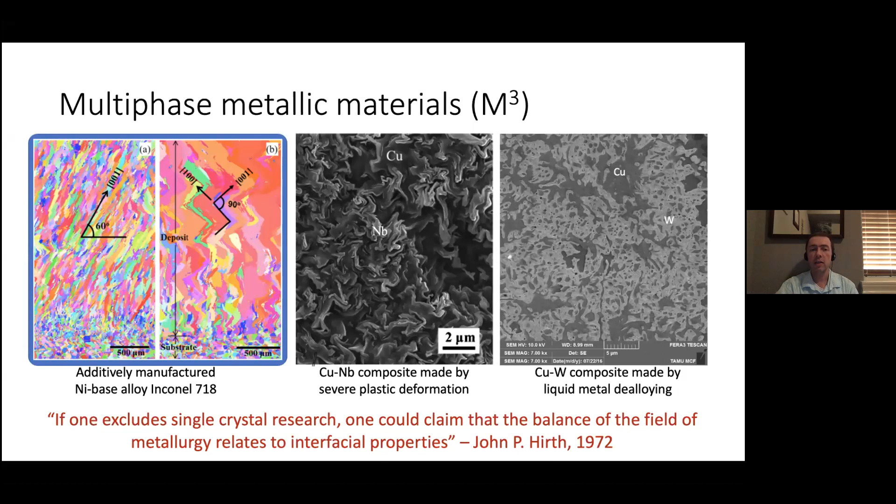Of course, this is true of the response of materials to all kinds of different stimuli, including mechanical deformation, irradiation, corrosion, and all kinds of other factors. But in the Center for Research Excellence on Dynamically Deformed Solids, we are in particular interested in high strain rate mechanical response.

This is the only organization slide I'll show related to the center itself. We are a center that got started in 2018. We have four different institutions—Texas A&M is the lead university, and the other three are UC Santa Barbara, University of Michigan, and University of Connecticut.

Our goals are to predict the influence of microstructural heterogeneities, especially interfaces, on high strain rate response. That's basically all I'm going to tell you by way of introduction.

The rest of this talk, I'll go through three separate vignettes where I tell you a little bit about examples of how interfaces influence material properties.

Here are the spoilers—I'm going to come back to this at the end of the talk when I wrap up. The big takeaway messages I want to give you are that interfaces are not just dividing surfaces between grains; they have their own structure and their own properties. Interfaces affect materials' response at multiple length scales, and that'll become clearer in a minute. And we now have the computational and experimental tools to build fundamental physical understanding of solid state interfaces.

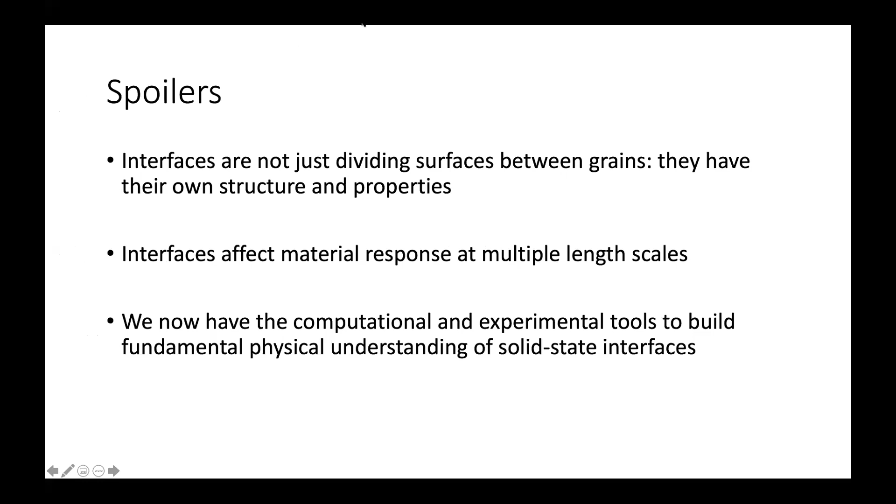So let's move on to the first one, interface structure at the composite scale. Let me just make clear what I mean by that.

At the composite scale, here are examples of two composites. The one on the left is a composite of copper and tantalum in 50-50 proportions, made by equal channel angular extrusion, a processing method used for changing the internal structure of composites. The one on the right is a copper-iron composite made by direct metal deposition, a kind of additive manufacturing of metals. In both cases, you can fairly easily see that there are phase boundaries.

So for example, here are some phase boundaries on the right. Those lines I drew are phase boundaries. Here are other phase boundaries on the left. Within each phase, there are also grain boundaries, since these individual constituents are not single crystals—they have multiple grains inside, and between all of those grains there are grain boundaries.

So these composites are made up of different phases, but they're also made up of different interfaces. The question we have is: how do the properties of those interfaces influence the response of the composite? I'll give you one simple example of something we've actually investigated recently within CREDS, just to give you a sense of the effect interfaces can have.

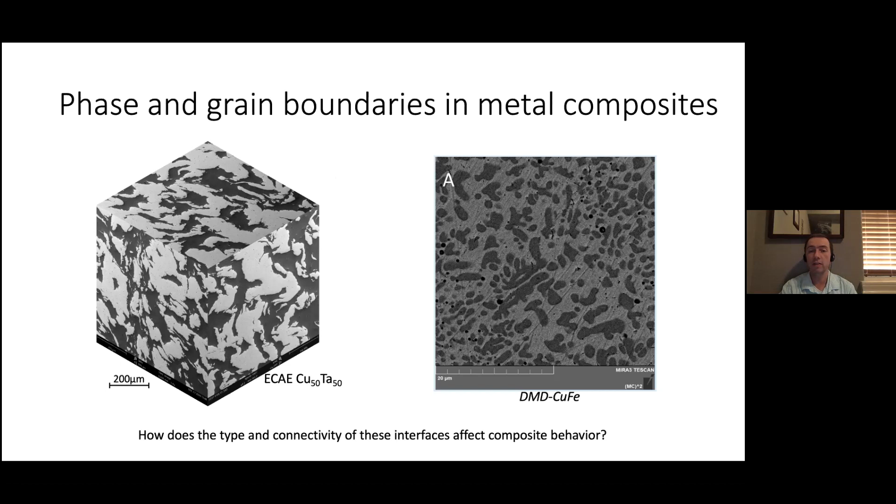I'll briefly tell you about some finite element modeling we did. This is an FEM domain, a simulation domain we investigated, where we put in a crack. This initial crack could be there from processing, from deformation, or through a variety of environmental factors as well.

We applied a far-field tensile strain on this model by applying tractions at the end of a large region, region 2, which was coarsely meshed to conserve computational resources. On the inside, we had region 1, which was more finely meshed.

If you zoom in and look, we actually made it so the structure was made up of a microstructure, a tiling of hexagonal grains. You can orient a tiling of hexagonal grains in different ways. We had orientation 1, shown here in the middle, and a different orientation, orientation 2, which was a 30-degree rotation of the first.

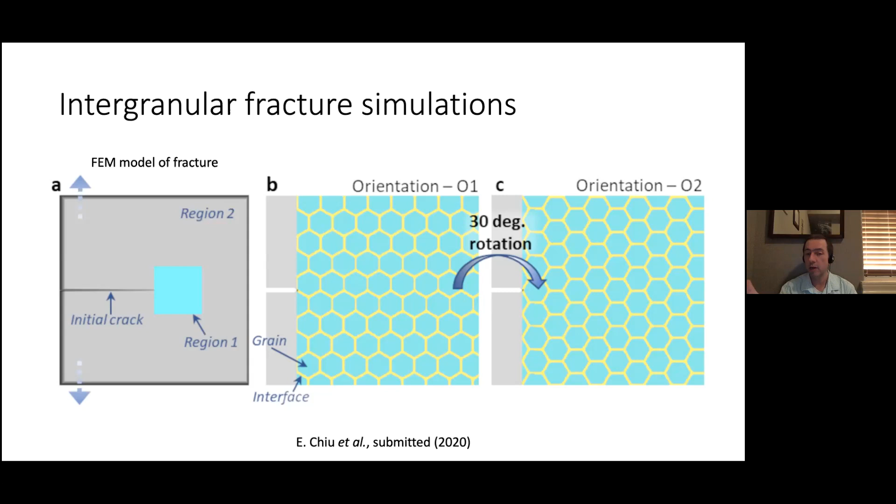We investigated how the crack runs through these microstructures. Here is a crack that runs through orientation 1, when all of the grain boundaries are exactly the same type—let's say all equally strong—and the crack is oriented for easy propagation along the interfaces between these grains. This solid very easily undergoes intergranular fracture.

If you look at orientation 2, the crack now takes a somewhat more tortuous path. It's harder for it to go from left to right, because this particular orientation isn't as conducive for a straight crack to run directly across. You see a bit more tortuosity, a bit more deflection, but overall it's still a single crack running from left to right.

What we did then is start introducing into this model elements, in particular interfaces with a different strength from the yellow interfaces here. The yellow interfaces, which you can see here, are strong—what we call strong interfaces. Scattered throughout the models on the right, you'll see a couple of isolated instances of red interfaces, and those are weak interfaces. So we scattered in occasional weak interfaces and repeated the simulation to see what happens.

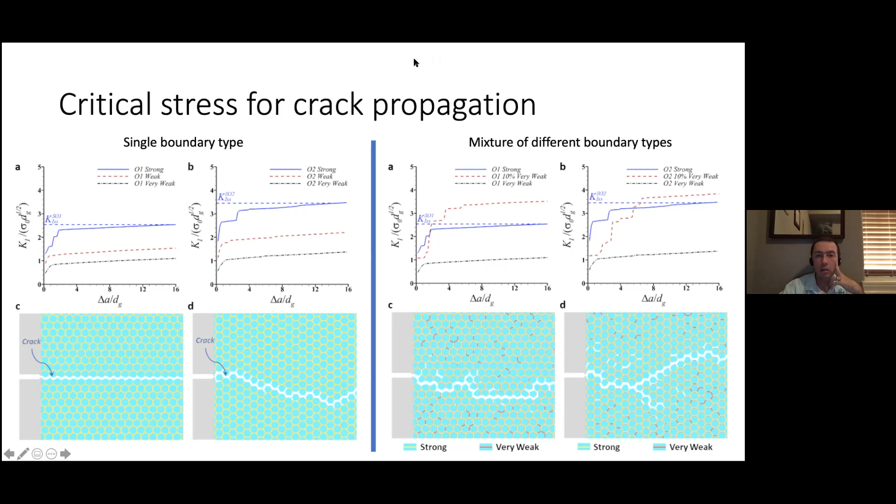So let me show you, oops, geez, this thing is just not cooperating today. Okay, so let me show you some simulations.

This is a movie of one of those cracks running through. It starts out barely moving along, and then suddenly shoots across as soon as it reaches that critical stress intensity. If you look closely, you can see the daughter cracks and branching events occurring as this crack tries to propagate from left to right.

Same thing here, this is the other orientation. You see a bit more daughter crack nucleation, a big branch here, and then another branch with additional daughter cracks moving off to the side. Now that we've figured out how to do these simulations and analyze them to find the critical stress intensities, we can plot those as a function of the fraction of strong versus weak grain boundaries.

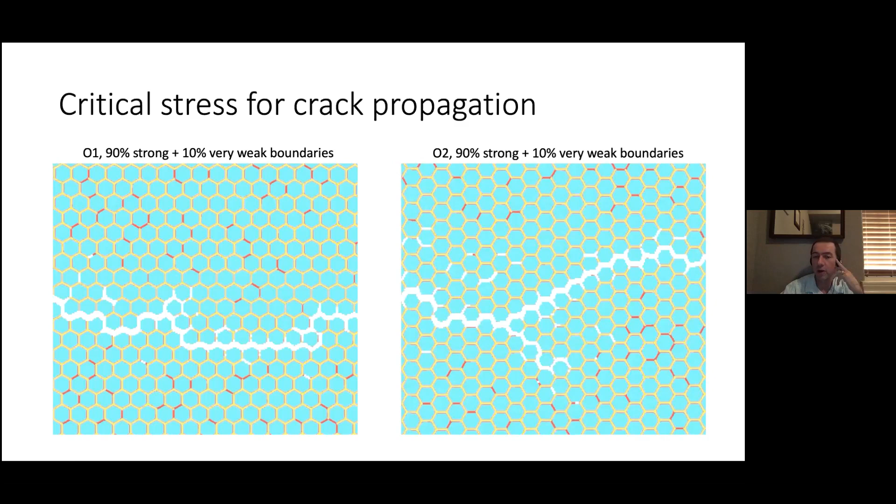And we get to a very interesting conclusion. This is the critical stress intensity normalized by the stress intensity for a uniform microstructure containing only strong boundaries. You can see that the critical stress intensity is not optimal when all the grain boundaries are strong. In fact, the highest toughness occurs when you have a certain admixture, a minority fraction, say 10 to 20%, of weak grain boundaries.

This red curve shows how the toughness evolves as a function of the admixture of weak grain boundaries. We also looked at another type, called very weak grain boundaries, with even lower intrinsic toughness—that's the black curve. As you can see, there is an admixture of weak grain boundaries that actually toughens the material. Moreover, as you make that admixture weaker, this toughening effect becomes more pronounced—the weaker you make the boundaries, the tougher the overall composite becomes.

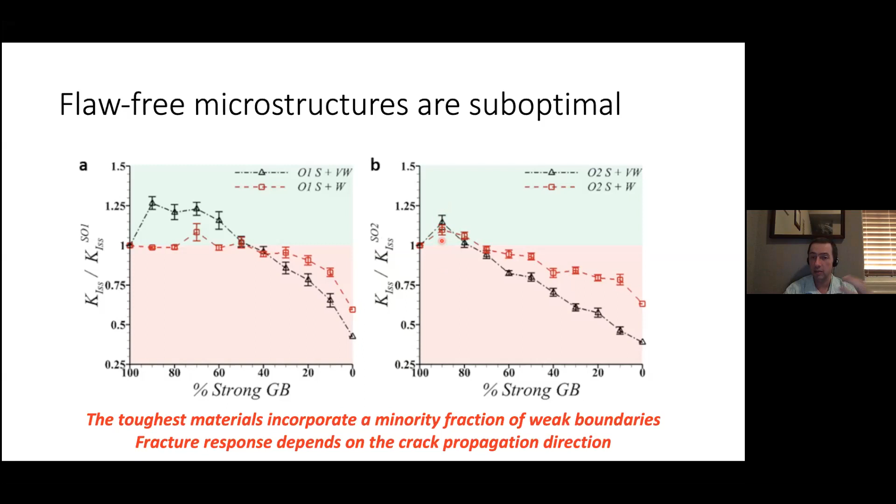But there is some range of weak grain boundary fraction that will actually toughen the material. So this is an example of an investigation that shows us how connectivity of boundaries at the scale of the composite, at the scale of the overall composite structure of the material, influences the properties.

So I'm going to move on—that was vignette number one, if you will. I'm going to move on now to the second vignette.

The second vignette is going to deal with what I would call the mesoscale. The origin of the word meso means intermediate, between. So basically this is the scale between scales—higher than the atomic scale, but lower than the overall composite scale. Typically people associate the mesoscale with micron level dimensions, so micrometer level dimensions in the case of metal microstructures.

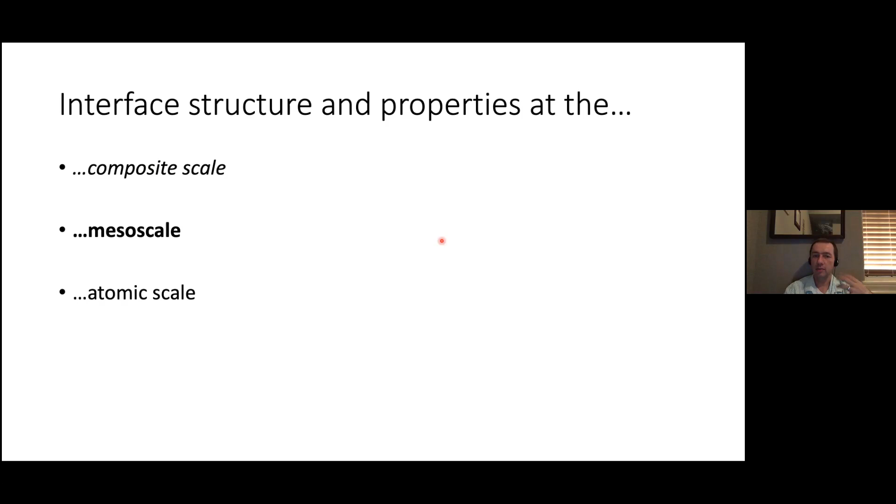At this mesoscale, we are interested not only in the overall structure of the composite, but also how the individual boundaries in that composite behave. So in this vignette, just to illustrate how we do investigations on mesoscale properties, I'm going to describe a study we did on a nickel-based superalloy.

This one is Inconel 725. This particular sample on the left—I apologize for the missing scale bar—is about 1 centimeter in diameter. It was tested to failure in tension after charging with hydrogen. Some of you might recognize hydrogen as an embrittling agent, so hydrogen makes things more brittle.

When a metal fails under hydrogen embrittlement, oftentimes it fails along the grain boundaries, leading to intergranular fracture. The question then is, which grain boundaries are the weak ones and which ones are the strong ones?

To answer that question, you have to descend to the microstructure level, and rather than focusing on how the boundaries are connected, you focus on the individual boundaries. What you see here on the right is an EBSD scan—electron backscatter diffraction scan—taken in an electron microscope.

In this particular scan, you can actually observe individual grain boundaries. For example, let's say I have... let's do it again. I can't see my cursor, I can't annotate very well, guys, I'm sorry. This right here, for example, would be an individual grain boundary.

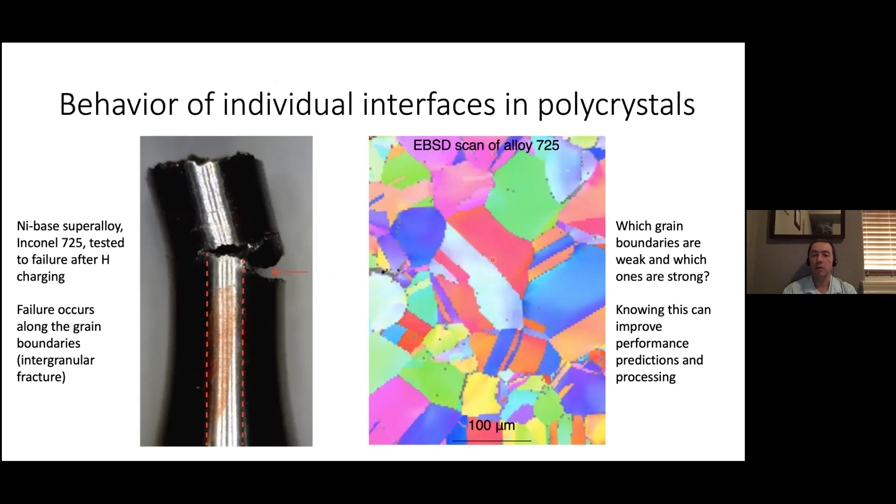So if we are interested in characterizing individual grain boundaries, one of the first things we need to think about is the grain boundary crystallographic character. Let me give you a brief introduction to grain boundary crystallographic character.

You can think of this as describing the large scale, the macro scale degrees of freedom of a grain boundary—the fewest number of degrees of freedom you need to actually specify the character of the boundary. The way we do that is we imagine a crystalline grain, illustrated here on the left as a cube, oriented in some reference frame.

So this is XYZ, that's my reference frame, and this is going to be one of the two grains that meets at a grain boundary. The next thing we have to specify is the orientation of the second grain, the other grain that forms the grain boundary, because a grain boundary is a place where two grains join.

So we're going to envision another grain which is oriented differently from the first one. Of course, we could also think about a grain oriented identically to the first one. However, if we take two identically oriented grains and join them, we just get a bigger grain.

If you're looking at grain boundaries, or homophase boundaries—boundaries between identical phases—if the two phases are oriented identically, you join them and just get a single crystal of larger dimensions. However, if these two phases are oriented differently in space, when I join them, they're not going to make a perfect joint.

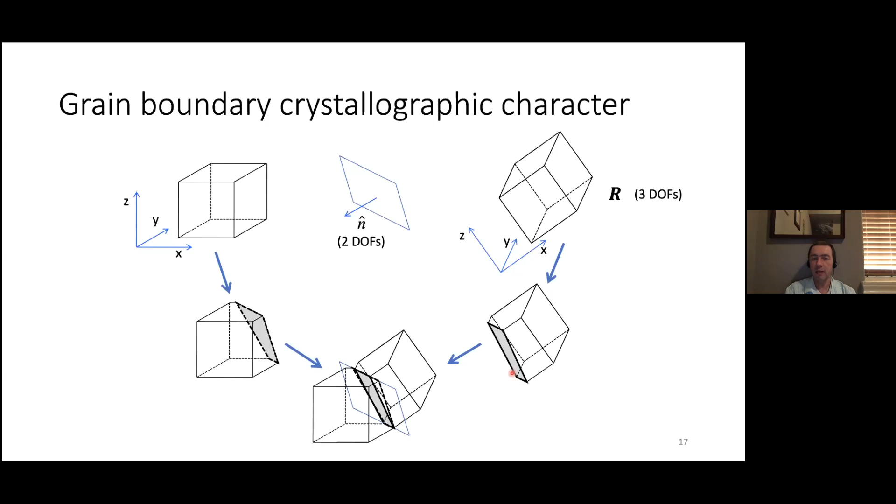In theory that's nice, but how do we actually investigate that experimentally? One way is 3D X-ray grain mapping. The capability to do this is available, for instance, at the Advanced Photon Source, APS.

This approach uses diffraction. It illuminates a sample of about millimeter-scale dimensions, then measures all the Bragg reflections from different grains at different distances from the sample. By extrapolating a line through the points at a given Bragg reflection, you can locate in 3D the corresponding grain in the sample. You get lots and lots of these spots, so you have to figure out the data analysis for all these diffraction images—that's really the main difficulty.

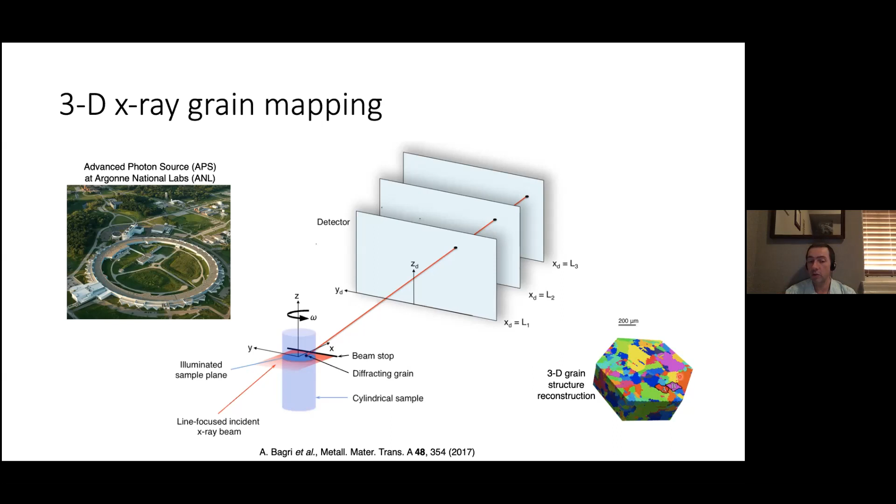But once you've gone through the analysis, you get a 3D reconstruction of the grain structure. Here's an example of one of those reconstructions. Each individual patch of different color is a distinct grain, so you get the shape of the grain, its location, and its crystallographic orientation. This is a very powerful technique.

We used this technique to study the sample I showed you before. Here's that tensile specimen—we cut out millimeter diameter samples from it. This is a top view of where we cut those out, and this is the 3D grain reconstruction shown on the bottom. The technique, as it's called at APS, is high energy diffraction microscopy, or HEDM.

At the same beamline, you can actually do X-ray absorption tomography, which is very nice because you need that to map out, if you're studying a specimen like the one we had here with a big internal crack, the shape of the crack.

You can then correlate these two 3D reconstructions, register them, put them into registry with each other, and figure out the sizes, shapes, and orientations of all the grains along the entire crack face in this sample. So this is a very powerful technique.

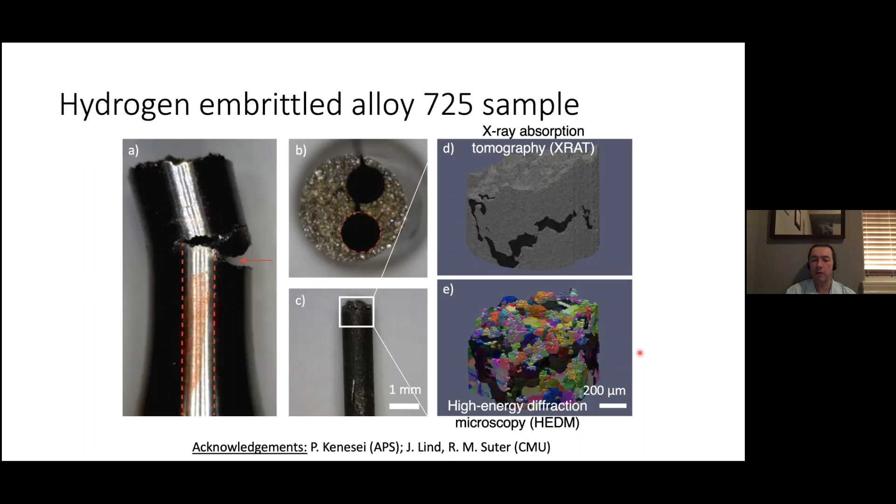What we found when we did this study is that if you look at how the crack is progressing through the material—in this particular image, the crack is coming from the right and moving to the left—there are a number of crack deflection events where the crack is propagating along a grain boundary.

It encounters another grain boundary like this one, which seems to be very favorably oriented for the crack to continue propagating along it. But instead of propagating along this grain boundary, the crack goes around the grain, it takes a detour, circumventing and avoiding this boundary.

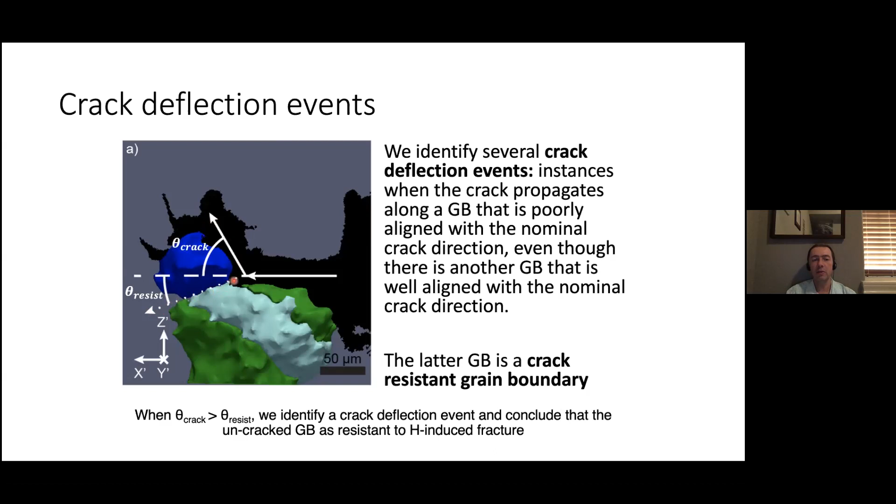So these crack deflection events, when they occur, signal to us that this particular boundary, the one the crack is avoiding, is especially strong.

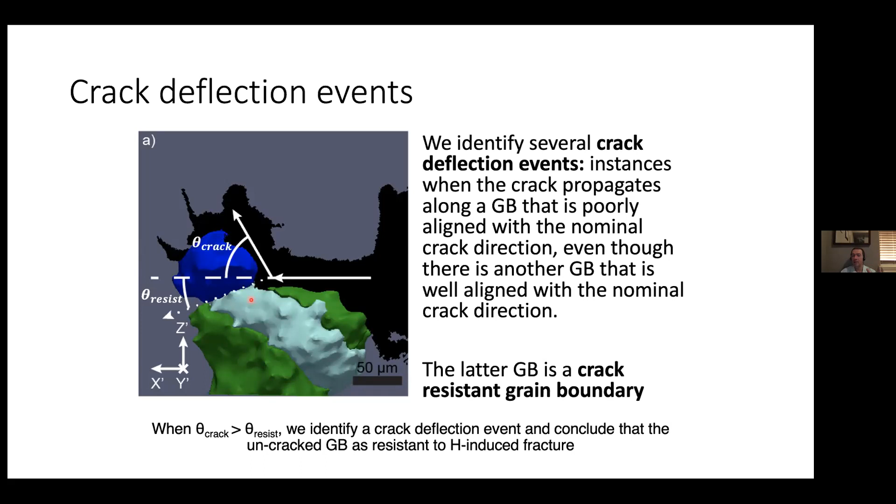So in one of the two grains, the facet plane is an 001 type plane, and in the other grain, the facet plane is a 111 type plane. So we get the full crystallographic character.

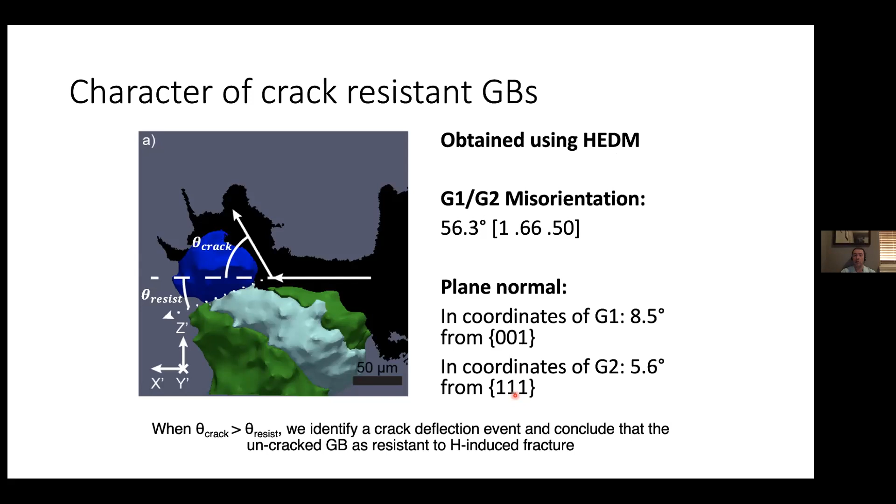We found 10 such crack deflection events in that particular study and sample. We looked for commonalities and saw that 9 out of those 10 strong boundaries were occurring along boundaries whose facet planes were of a low Miller index type—by low Miller index, I mean 001, 011, or 111.

We call those kinds of boundaries with low index planes 'blips'. All the ones shaded gray here show that at least one of the two planes is a low index plane.

All of these have 111 type low index planes. This one has 001, 001. Here, this one would not be considered a low index plane—that's just for grain 2. If you look at grain 1, it has a low index plane, 101. And here is a 123, which we would again not consider low index, but the matching grain is a 111, so that's low index.

There was only one strong boundary whose plane was not a low index plane. So this is a very good correlation between the strength of boundaries and their crystallographic character.

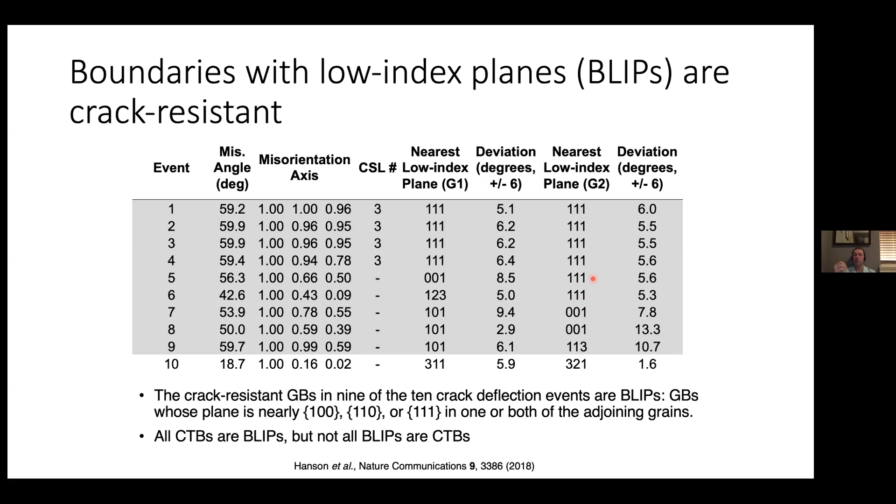So this is an example of how we can study grain boundaries at the mesoscale, at the level of individual grain boundary properties—that's vignette number 2. Let me move on to vignette number 3, where we are now studying interfaces at the atomic scale, looking at their structure and properties.

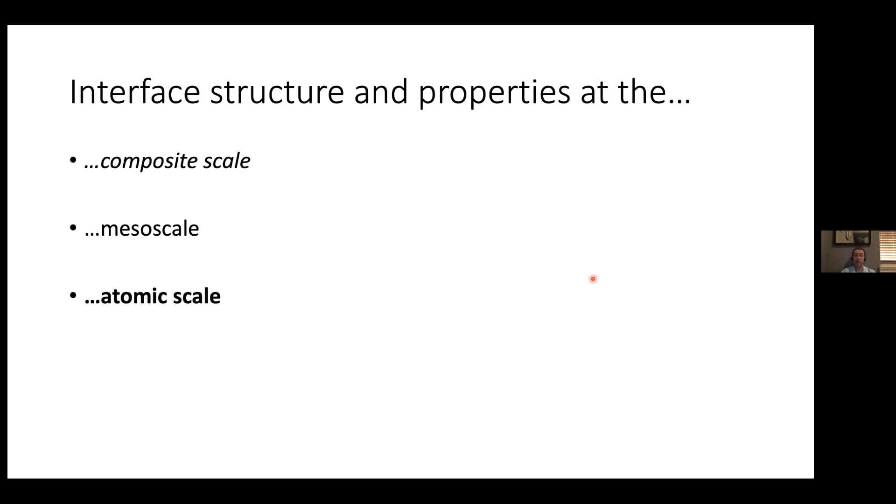I want to show you a simple scheme for classifying interfaces according to their atomic structure. I have to give you a caveat right up front that this is not the only way to classify the structure of grain boundaries or interfaces—there are other approaches. However, I wanted to introduce this approach because it's fairly robust, and also because I wanted to talk about this middle class of interfaces that I'll introduce to you in just a moment.

Alpha iron is a BCC, body-centered cubic material. This coherent sigma-3 twin boundary has a boundary plane along 112 type facets in both of the two neighboring grains.

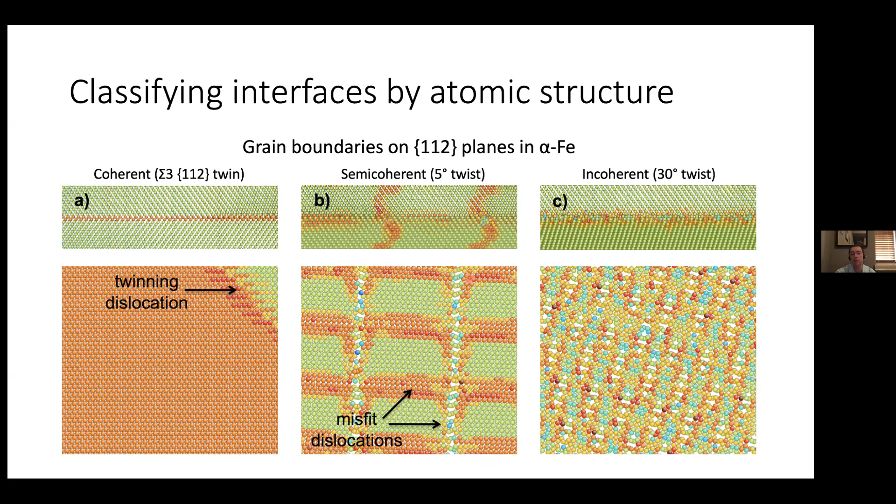One of the nice things about these semi-coherent interfaces is that we can actually be quantitative about describing the structure, for example, in terms of the spacing between the dislocations found at this interface, their direction with respect to the crystal orientation of the two neighboring grains, and the Burgers vectors of those dislocations. Those are all quantitative ways of describing the structure.

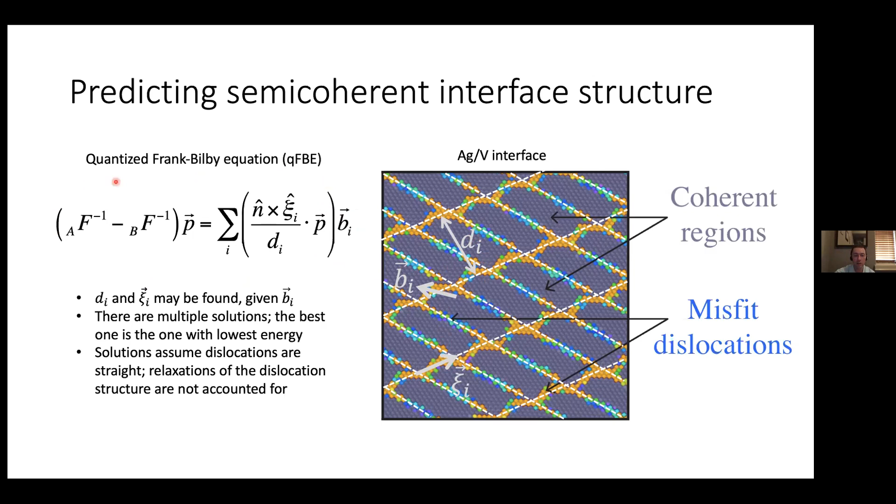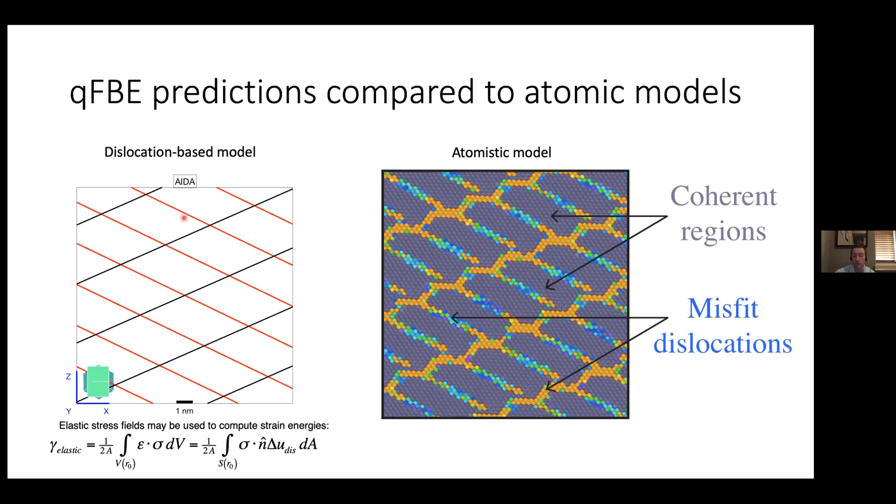Once you know the stress and strain fields around the interface, you can calculate the energy of the interface, or at least the strain energy contribution coming from these dislocations. So the upshot is that now you can make models that are quantitatively predictive, that can predict interface energy, for instance.

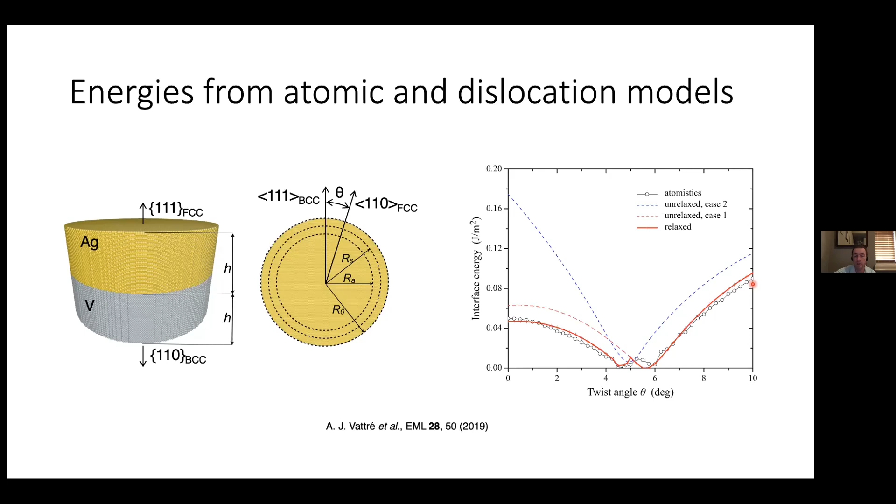So this is one way that you can describe interface properties using dislocation models. Let me give you another example of how you can describe interface properties using dislocation models.

Accumulated roll bonding is something you might be familiar with from making a katana, like a samurai sword, where they flatten it out by hammering it, fold it in half, flatten it out again, and fold it again. So basically you're stacking layers of material, rolling them out flat like dough, then cutting them, stacking them again, and rolling them out again—doing this over and over.

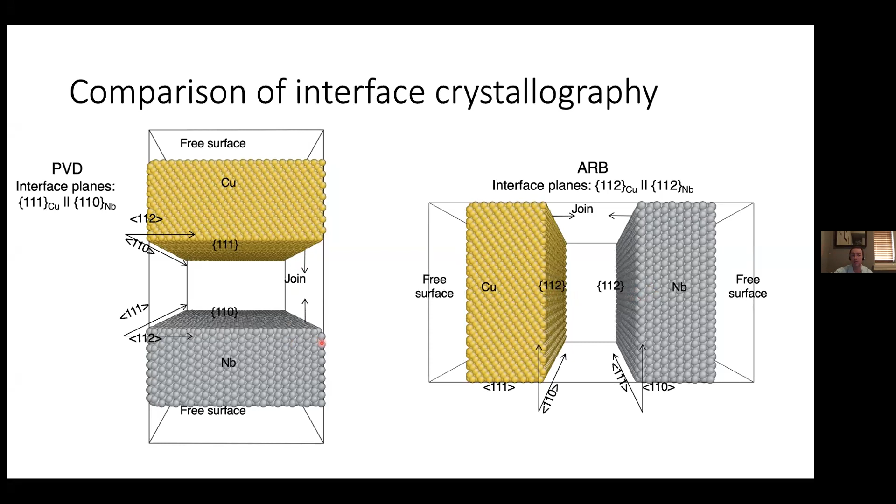So the ARB interface planes are different than the PVD interface planes. And it turns out that this has an enormous influence on the properties of these interfaces.

If we were to look at the PVD interface, here it is again, looking edge on. On the right, I'm showing you a top-down view looking into the interface plane of this copper niobium interface. You can already see just by eyeballing it that it has this sort of quasi-periodic structure in it. But if you do a more detailed analysis, you can figure out that this quasi-periodic structure is the outcome of misfit dislocations that are present in this interface structure.

This particular interface contains two sets of dislocations. This is one set, this is the orientation of one set of dislocations, and here's the orientation of the second set. All those little places here where you have near perfect coincidence between a copper and a niobium atom are actually the intersections between those dislocations, so those are misfit dislocation intersections.

Now, an important fact about this particular interface is that both sets of dislocations have Burgers vectors, indicated here by these arrows, that are entirely contained within the interface plane. They have no component pointing out of the interface plane.

Those of you who are familiar with dislocation mechanics recognize that when you have a dislocation with a certain direction and a certain Burgers vector, the plane defined by those two vectors is the glide plane of the dislocation—the plane along which the dislocation can easily move, the plane that contains the line direction and the Burgers vector.

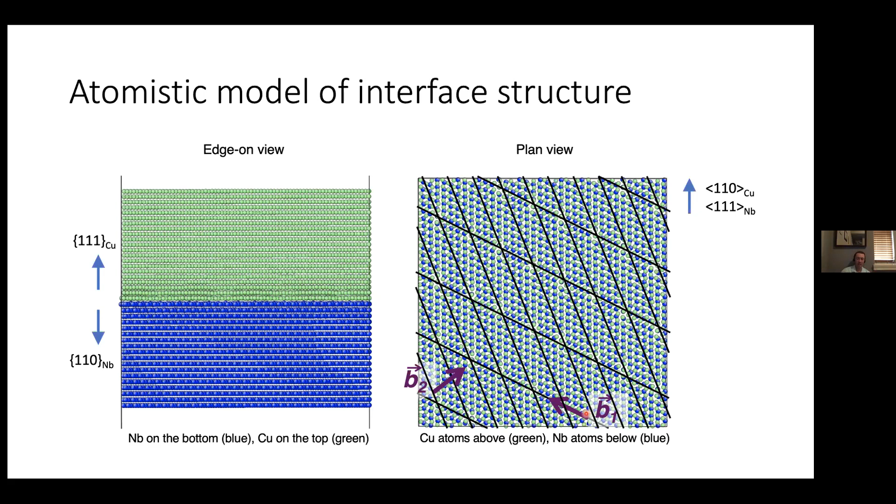So in the case of these particular sets of dislocations, the glide plane of both sets is the interface plane, and that's a fairly important feature of this interface, because what it means is that if I apply shear stresses to it, this interface is actually very, very weak in shear. It can slip—these two neighboring crystals, the copper and niobium crystals, can slip past each other extremely easily.

By the standards of shear resistance, this is a very low number. So this interface slips very easily, and it's a direct consequence of the way that the dislocations in that interface are configured. Here's the other interface that I was telling you about.

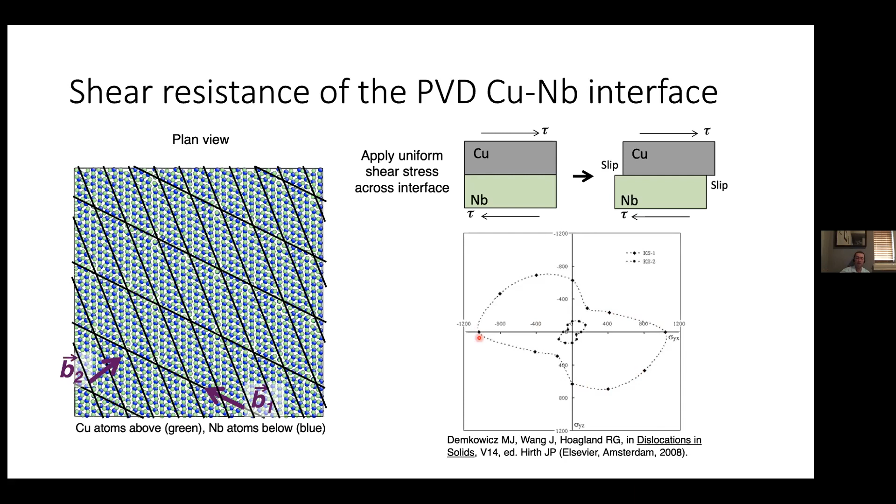I'm sort of telling you this information about the locations of the dislocations without proof, if you will. But maybe just to assuage your curiosity, there are actually rigorous ways of showing that these dislocations are indeed present in these interfaces, as well as figuring out what their Burgers vectors are.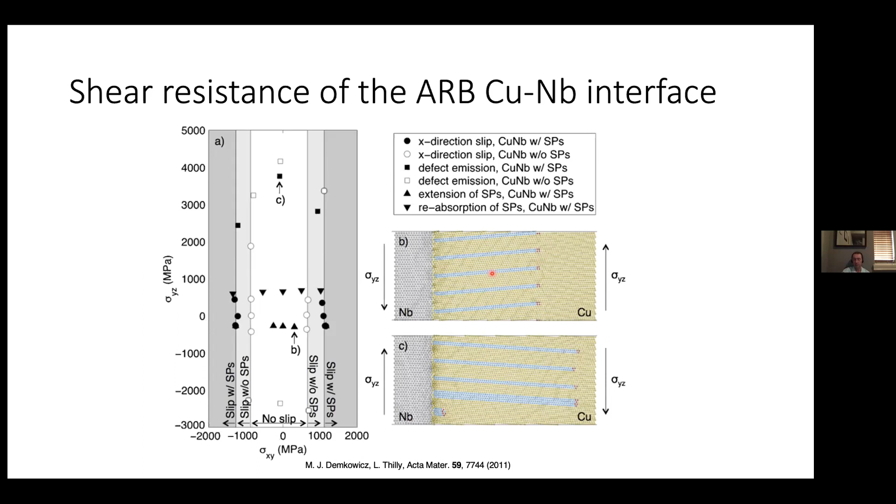With that, I wanted to end my last vignette. I'm going to go back to my takeaways, which are precisely the spoilers I showed you at the beginning, except now with a little more detail. Interfaces are not just dividing surfaces between grains, they have their own internal structure and properties, and I gave you examples resulting from the connectivity of interfaces, their crystallographic character, as well as their defect-based structure.

Interfaces affect properties at multiple length scales, so I showed you examples from the composite scale, the mesoscale, and the atomic scale.

The other important observation you can make, which is very clear when you look at the field of interface research today, is that we now have the computational and experimental tools to actually build up a fundamental physical understanding of how solid-state interfaces work.

This was not the case only about 20 years ago or so. There was very little you could do quantitatively in studying interfaces, but now we have advanced processing and testing methods that allow us to do small-scale tests, and make materials with controlled interface distributions and things like that.

We have electron and X-ray characterization methods that allow us to plot out the shapes and orientations of microstructures in 3D. And we have multi-scale modeling methods that allow us to actually simulate the way that interfaces will behave, going all the way from the atomic scale to the scale of the composite itself.

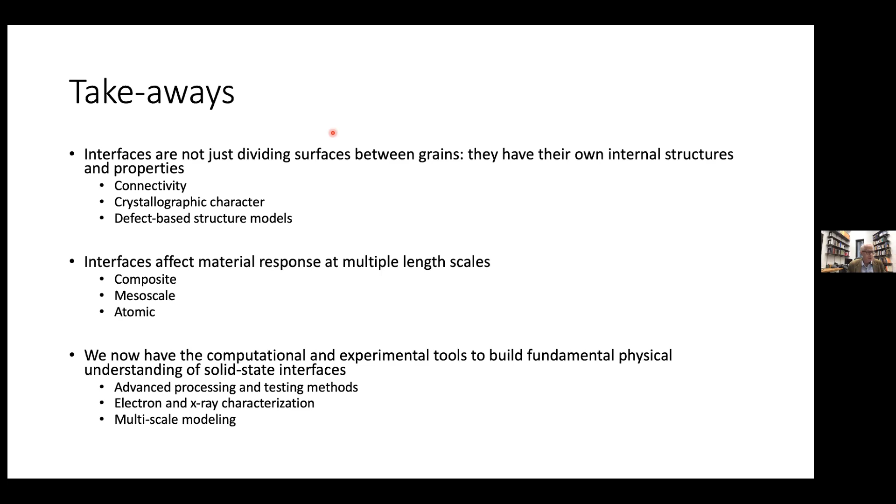More questions? I have a question about the underlying force model you use in your atomic scale simulations. You didn't describe that—how robust is it, and how well validated is it, in terms of atomic structure and so on?

Sure, that's always a big question with atomistic models. For all the examples I showed here, we were intentionally dealing with combinations of metals we are confident we can model accurately using atomistic methods. The models we use for copper and niobium: copper is an FCC material very well represented using embedded atom potentials, extremely well represented using EAM potentials. Niobium is a BCC material adequately represented using EAM potentials, although not as well as copper.

The copper-niobium binary system has very limited solid solubility. Copper and niobium are like water and oil—they don't mix, they tend to phase separate. So there's very little solubility, they don't form compounds or intermetallic phases. Constructing a potential that reproduces that kind of simple phase diagram is not too difficult, and you can easily show that your potential reproduces it.

So for this binary system made of two elements we think we can model well, having very little chemical complexity in itself, we think these models are actually pretty good. Correlating predictions from simulations to things done experimentally, we can make direct comparisons thanks to that.

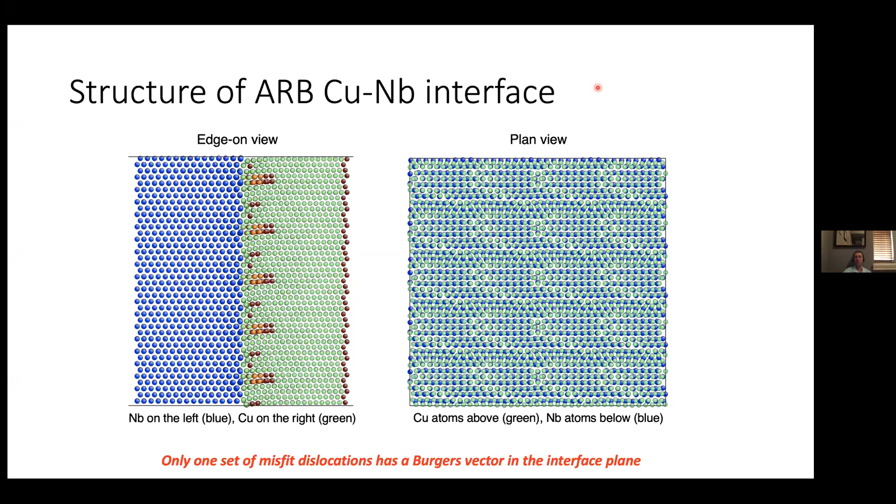No, the models are generally completely different. Passing information from one type of model to another is one of the big challenges of multi-scale modeling. For example, this model I'm showing you is an atomistic model. The entities you track here are the locations of individual atoms, meaning the nuclei. This particular model doesn't track electrons separately, although there are DFT simulations that do track electrons.

Meanwhile, in a model like the ones I was showing you before, these are finite element models, so they represent the material as a continuum, and they homogenize, averaging over the properties. They assume every point in this model can be thought of as a representative volume element of the material, so that its response is described using a generalized Hooke's law for elastic behavior, and J2 plasticity for the plastic deformation behavior. It's solved using a partial differential equation solver, such as the finite element method.

Whereas to work with that atomistic model, we would use ordinary differential equation solvers to propagate the atoms forward through time along their trajectories. So, completely different simulation approaches, you could say.

The big question for us is how do we extract information from the atomistic scale and then inform the higher length scale with that information. That's really the challenge of multi-scale modeling, and that's where a lot of the effort goes. Running these simulations these days is not terribly difficult—the codes have been developed, we understand how they work, we can adjust them to the properties we want. The real difficulty and challenge is in extracting information and figuring out a way to pass it across scales.

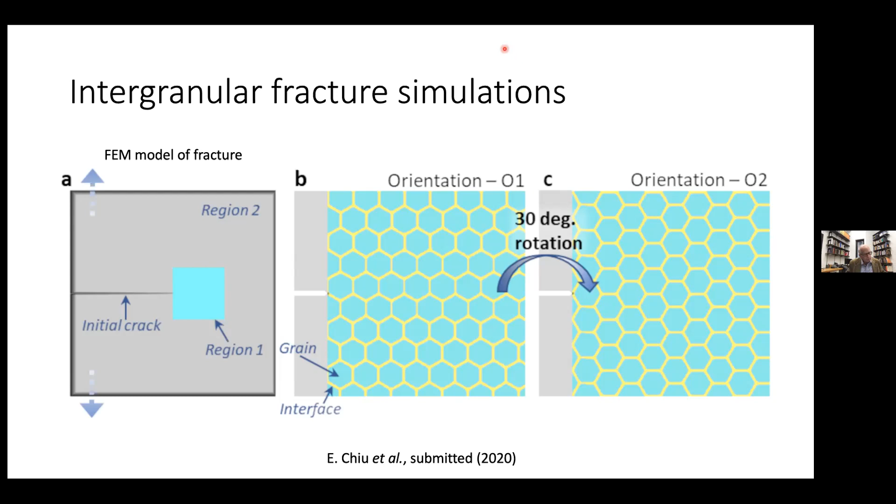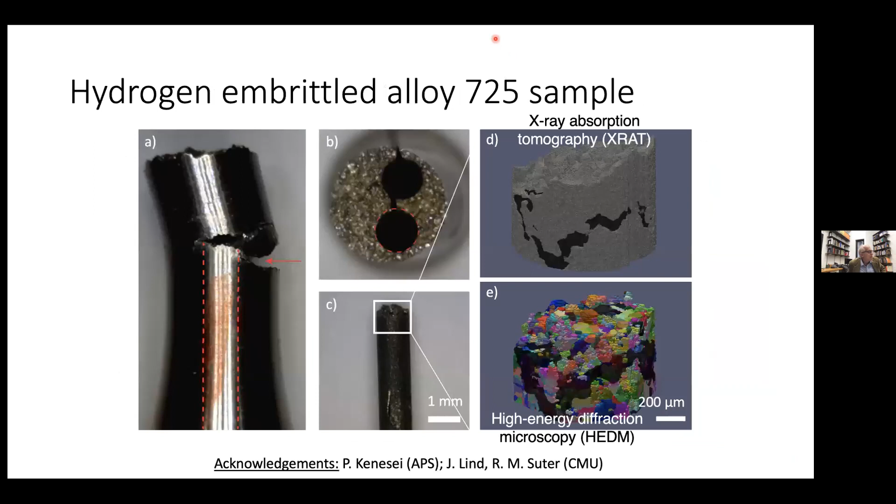I guess I was impressed by the work going on at APS and how you're using it for tomography and microscopy. That's really exciting, and it overlaps with some of our interests—we use the APS, and our center's interests overlap a lot with what you described. This was the 1ID beamline, with Peter Kenesei in charge of it.

It was a very interesting experiment. I think we were probably the first group of users that wasn't part of the development team. The experiment took a few days, and then the analysis took a few years. Multigrain diffraction is also a growing area for in situ high pressure work, and that's being done at HPCAT.

Another sort of validation point—maybe this concerns when you calculate an interfacial energy, for example. To what extent can you validate those kinds of predictions, say with calorimetry? Can you extract that information calorimetrically?

Not that I'm aware of, not through calorimetry, at least not conventional calorimetry. These days people have developed miniaturized calorimetry measurements—Joost Vlassak at Harvard, for instance, has this sort of calorimeter on a chip that they use. However, I'm not familiar with, and I've talked to him before about, whether it would be feasible to do calorimetry on individual interfaces. Honestly, it's still rather out of reach.